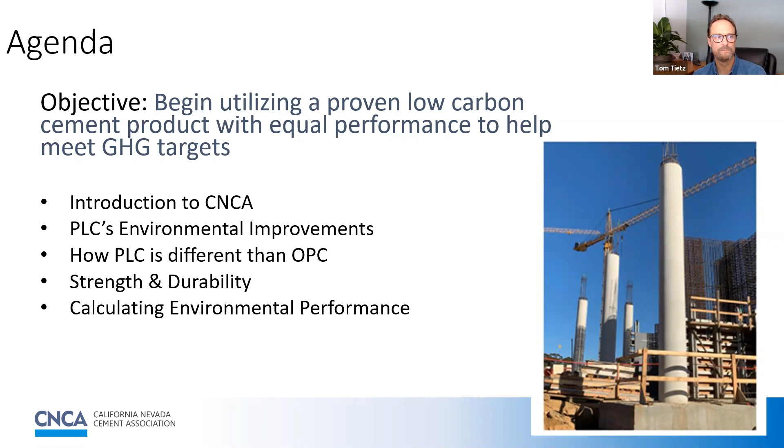Real briefly, CNCA has been around for nearly 30 years. We're a nonprofit trade association supported by the 7 cement companies in both California and Nevada. And if there's one takeaway that I would ask for when you think about CNCA after this morning, is that we're a great technical resource, whether it's about Portland limestone cement or anything else related to cement and concrete. We're here to be of assistance.

Well, here are some big picture items to keep in mind. The greenhouse gas targets that California has envisioned for the next 30 years are significant. And with cement making up about 1.8% of the state's greenhouse gas emissions, it has been carefully regulated by the Air Resources Board and will continue to be through this time. And it's important to note that as you look at this graphic, when 2020 hit, we started a new trajectory to get 40% below 1990 levels by 2030. So in the next 9 years, we've got a real challenge ahead of us.

And if you look at what's coming as soon as 2045, this is when the entire state is scheduled to be at net zero. We have to be on that trajectory. And Portland limestone cement is the first lever that we can pull to get to that level.

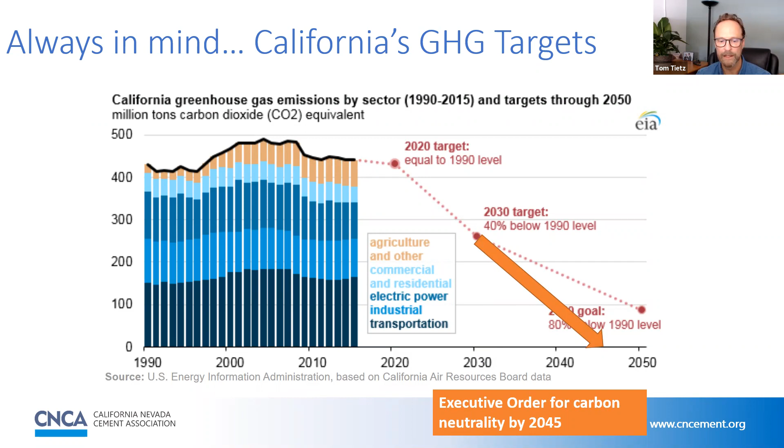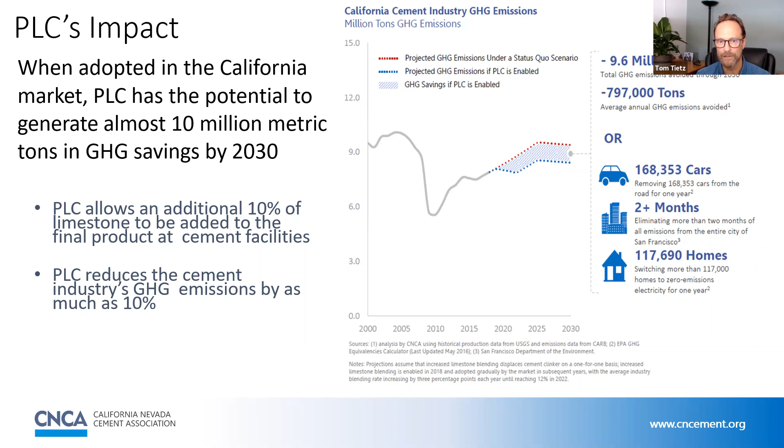Here's a graphic that just begins to show what that impact might look like just for the use of Portland limestone cement in the California market. If it were introduced and gradually adopted over a 10-year period of time, it would have a major impact, up to nearly 10 million tons of greenhouse gas emissions avoided.

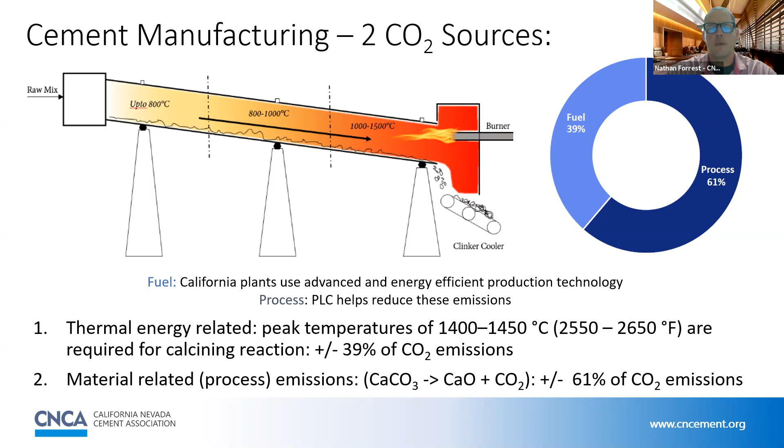When we heat limestone to that calcining temperature, the chemical reaction takes place that you see at the bottom of the screen here, turning limestone into lime and carbon dioxide, and that's responsible for about 61% of the CO2 emissions. Now, this process is the same whether we're talking about Portland cement or Portland limestone cement. The difference takes place in the finishing of the material.

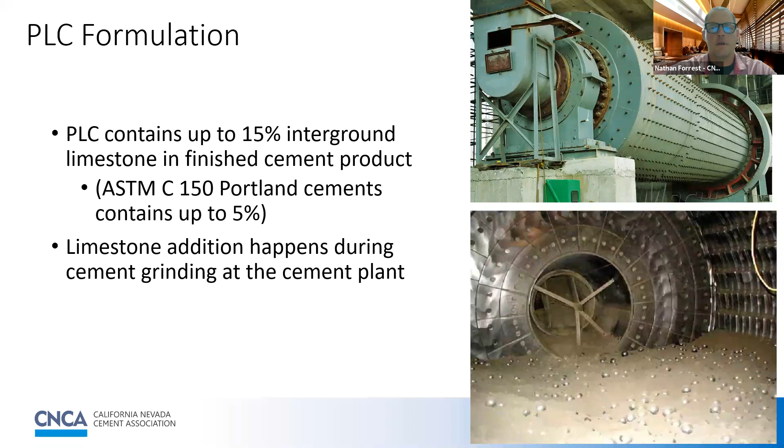This is a ball mill, and it's the final step in manufacturing Portland cement or Portland limestone cement. The difference is the amount of limestone that's introduced during this step. Portland cements under ASTM C150 are allowed to contain up to 5% limestone, whereas Portland limestone cements under ASTM C595 are allowed to contain up to 15% limestone. By doing this at the cement plant in the ball mill, we're able to produce a homogeneous material that's closely interground and performs very well.

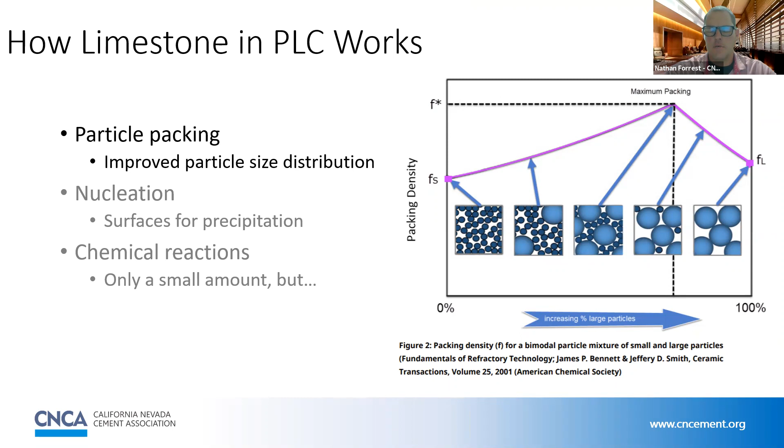A few different ways that Portland limestone cement works. The first is by improved particle packing and density. We do this in our aggregates for concrete or road base or anything else that uses aggregates to optimize the void structure and maximize the density. And the same thing happens here with our cementitious package in our concrete. It also creates additional nucleation sites from which our chemical reactions in our concrete can emanate.

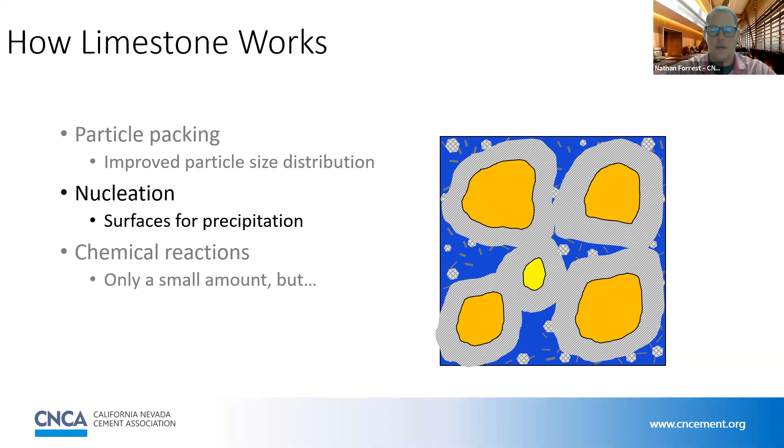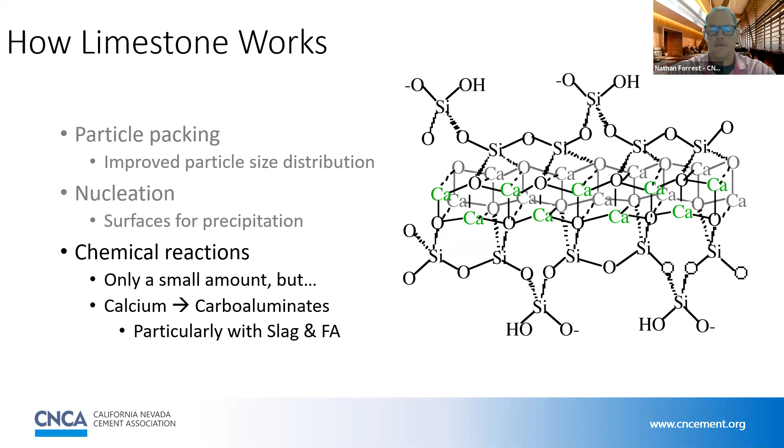And the third way is through chemical activity. These are somewhat limited, but can produce noticeable strength results when used in the presence of aluminate containing supplementary cementitious materials like slag and fly ash. And now we'll talk a little bit about strength and durability.

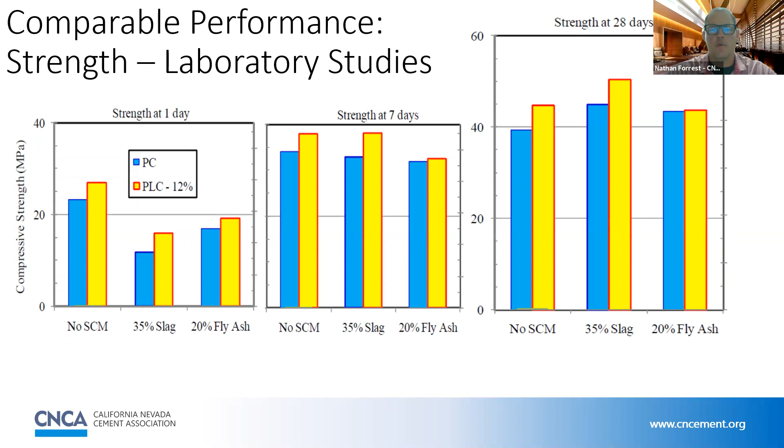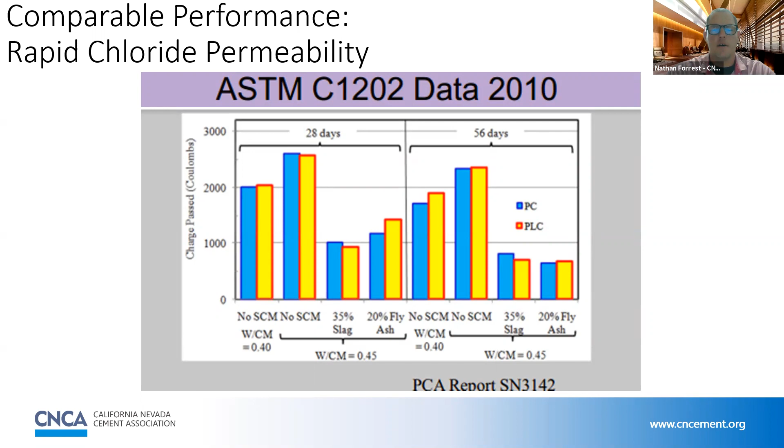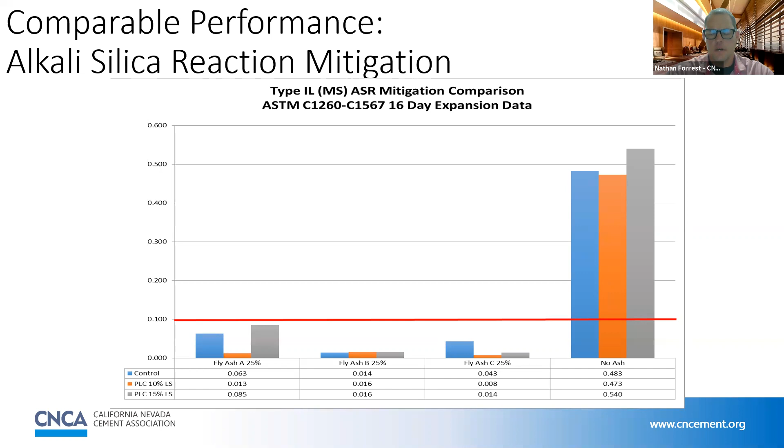We'll take a quick look here at alkali silica reaction mitigation as well. What we have, a little bit different color scheme because this graph is from a different report. We have an ordinary Portland cement mix in blue, a PLC at 10% limestone in orange, and a PLC at 15% limestone in gray. And what you'll see is that with the aggregate selected for this study, none of those cementitious packages mitigated ASR adequately without a supplementary cementitious material, fly ash in this case. But in the presence of fly ash from 3 different sources, all of those cementitious packages did mitigate ASR. So again, comparable performance.

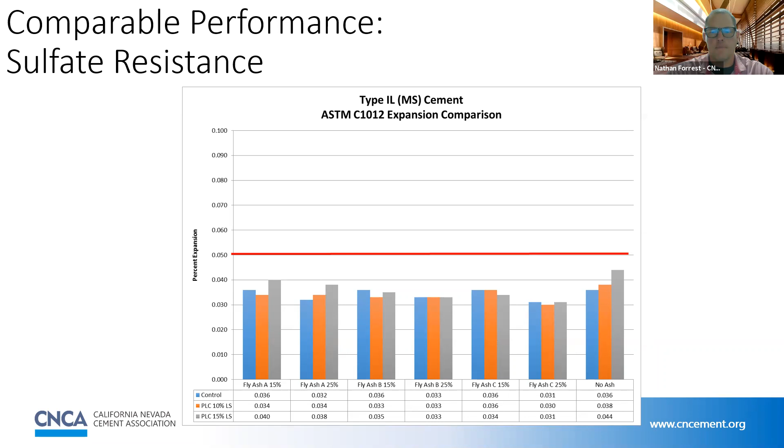Now let's take a look at quantifying the GHG savings. Tom hit on this a little bit earlier, but there's a new website that the Portland Cement Association has put out called greenercement.com. It has lots of information about Portland cement, how it can be used, why it should be used, case studies, etc. But one of the most valuable tools that I found on this website is a calculator wherein you can input the amount of concrete that a project is going to use, and it will tell you roughly what your CO2 savings could be if that project was specified to use PLC instead of ordinary Portland cement.

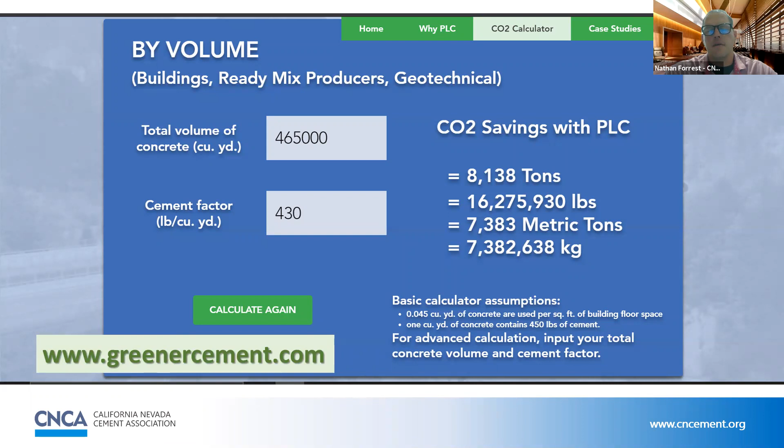So these are fantastic savings, and we would encourage you, if you get into a project where you can use Portland limestone cement, to calculate those savings and to celebrate those savings. And we'd love to help you celebrate that.